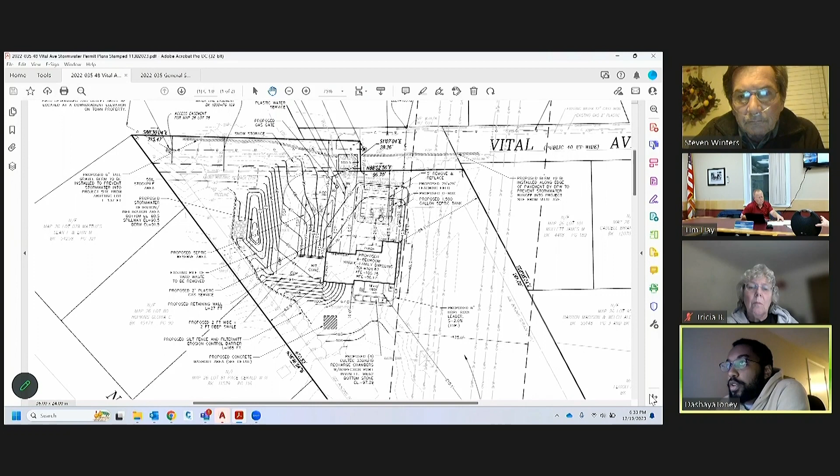My name is Dashaya Joney, I'm an engineer with MBL Land Development and Permitting. I'm here tonight on behalf of our applicant for a full stormwater permit application for the property at 48 Vital Ave. This is an existing vacant lot, and we're proposing the construction of a single family four-bedroom house with a septic system, site grading, access, and utilities.

As part of our project, going back to the town, there were some concerns from the abutters regarding the stormwater treatment at this site. So in order to alleviate those concerns, we prepared these plans and the application that we submitted a few weeks ago. Site grading wise, we're not proposing to send any runoff into the road by the lot.

We're going to capture all of the runoff generated by our site, both from the roofs. We're proposing subsurface drainage chambers in the back of the site, and we're also proposing a mini stormwater detention area that's going to hopefully capture the runoff that runs off of our site from the driveway and the rest of the yard into a little basin that will infiltrate some of the runoff before it goes into the spillway. Our hope is to alleviate concerns, because there have been some issues with heavy rainfall events at the site, due to the nature of the existing grading topography.

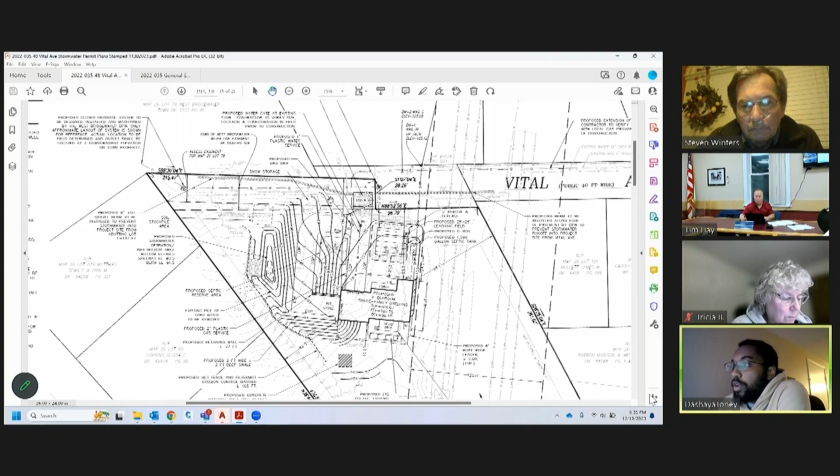With those measures, we hope to address the commission's concerns and the abutters' concerns in regards to the site, and at the end of construction, to implement these controls. We believe we have a working drainage design that will keep as much runoff as possible on site, and any runoff that is sent off site we capture in detention.

The abutters' concerns are with the runoff that's actually happening now off of the property. Once this basin is completed, will there be stormwater runoff continuing after that, or once it's loamed and seeded, will it all be contained in the basin at the bottom?

After it's loamed and seeded, in theory there will be very minimal runoff occurring. In a 100-year storm event, we had some very heavy rainfall early this week. There is bound to be some runoff that just isn't able to be contained in this little basin, but it is going to help the existing state of the site.

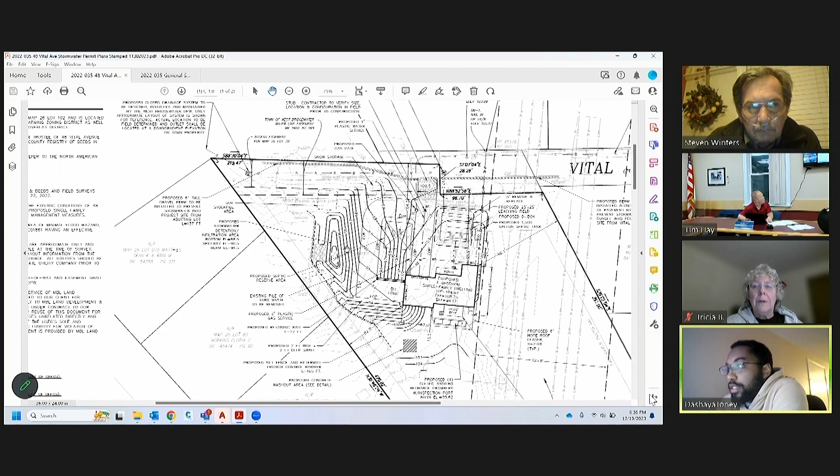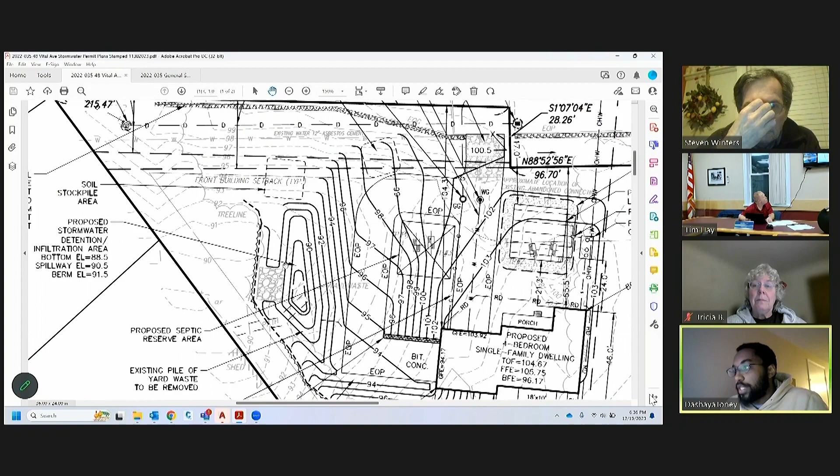I'll zoom into the existing conditions so you guys can get an idea of what the site looks like now. This low point right here is where the water goes, and they've been in touch with us and the town, and we've tried our best to alleviate their concern regarding this. Right now, this existing runoff all comes down to this low point off-site. We can't really make any changes to the property grading-wise, but with the implementation of this basin it should greatly help.

Especially when it's grassed and seeded, to infiltrate some of the runoff, so it's not sending all the runoff off untreated. We can't say for certain that nothing will be coming off site, but we've done our best to make sure that it's as little as possible.

Is this spot vacant right now, or is there a lot of trees they gotta cut down? It was a treed lot. Was? How long ago was it? Yes, years ago there were some trees present on the lot.

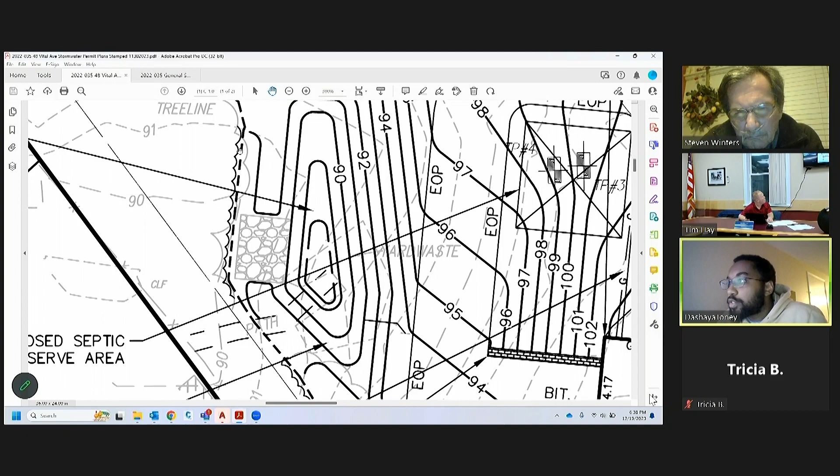We have that tree line shown right now, and we're proposing minimal disturbance to the tree line. You can see here we have our tree line, right next to our erosion control barrier, so we will be disturbing some of the trees in this area. But for the most part, in the rear of the site and to the right, we've tried to keep the tree disturbance as minimal as we can.

So there's no room to replace any of them on that? Doesn't look like there's much space left.

I'm new to this, are we allowed to butt in? Are we allowed to ask? Yeah, we will. Okay. That tree line, is it non-existent at this point? I'll open it up. If you want, I'm all done.

No, I was just wondering if there's any spot you can replicate those trees that were taken down. There's no wetlands on it, so this is stormwater only, so we really don't have a replication option. Okay.

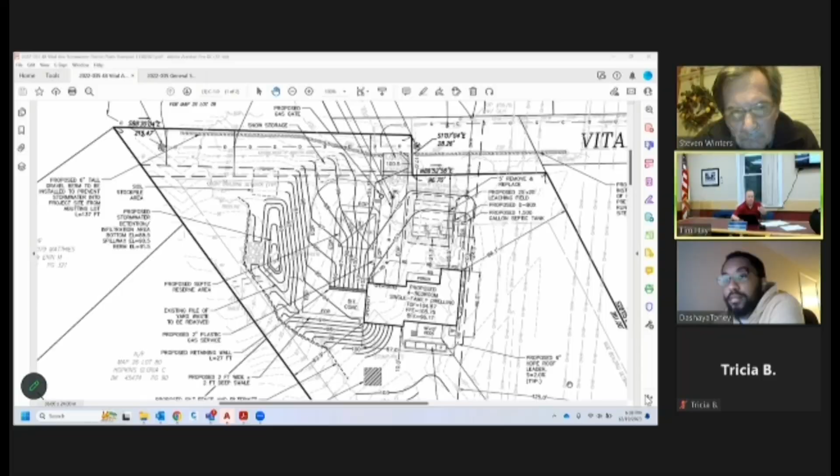Okay, now we're going to open it up. Anybody's got something to say needs to stand up, yeah, just give your name. Michael Cotty, 23 Norman Ave, neighbor to Gloria.

She's the one who's mainly getting hit with this water issue. Basically her backyard is a lake right now. I'm not getting hit that bad, but this tree line he's talking about, they gave us a 30-foot buffer after they took all the woods out, and it's doing absolutely nothing. It's scattered trees, maybe a dozen trees in that 30-foot buffer. So I don't know what he's talking about, trees helping out, because there's nothing there. And now they're talking about taking more of the trees out.

How was it before they cut the trees down? There was no water, I've been there 30 years, not a drop of water, never, especially on her property. She is the lowland person, and there was nothing there ever. Now she has a lake back there. She's got pictures to show you.

So this wetland proposal of his, disturbance, he's saying maybe it's gonna work, you know, in theory. All right.

Gloria Hopkins, 27 Norman Ave. Are you saying you're taking more trees down?

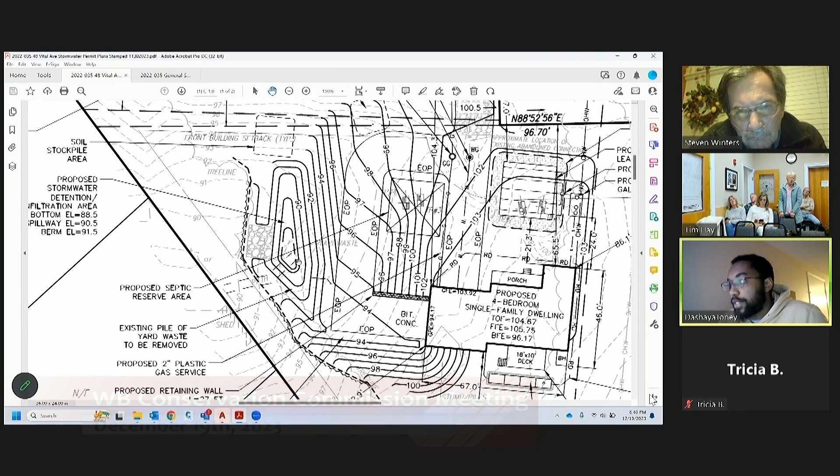May I answer that question, Mr. Commissioner? Okay, can you fix his mic? So I know, we are in this area, we're doing this, so just for the grading purposes, in order to install this basin, we are proposing to clear around, let's say, between 5 and 10 feet of trees in this specific area.

But you've already removed all my trees, that's why I have water. See, part of the problem with this is you've come into this with the lot already being clear cut. Prior to the starting of this single-family home, it was a treed lot, fully vegetated. And now that you have cleared it, we're getting the stormwater runoff issue, which never existed beforehand.

So you're guaranteed that you don't think there'll be any more? We're trying to make it so there is none, where there was none previously.

So we're looking for a little bit more guarantee that either this system needs to be made bigger, or it's going to work, or you can make the house smaller. It's too late, they already poured the foundation, already done.

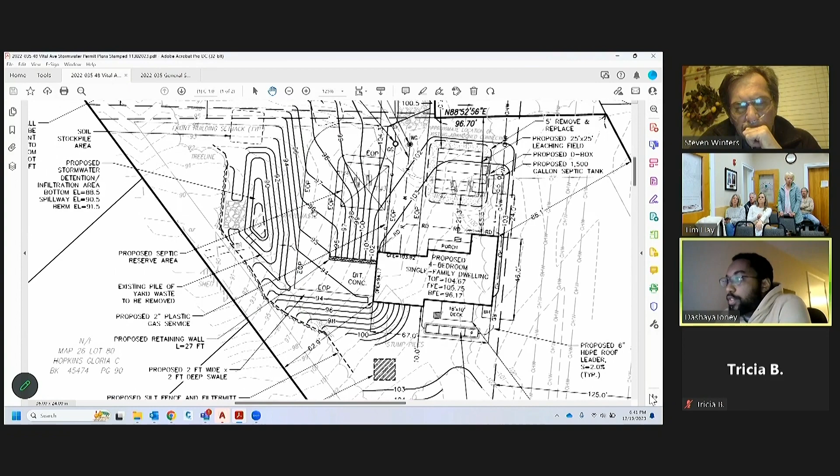If I may answer your question to hopefully alleviate some of your concerns. I definitely understand where you're coming from as far as the tree clearing goes. It was not the applicant's intent to bring more stormwater to you guys. To address that, the roof runoff will be fully contained within underground chambers, so there will be no runoff from the leaders. The only runoff coming from our side will be from the driveway and the grassy yard.

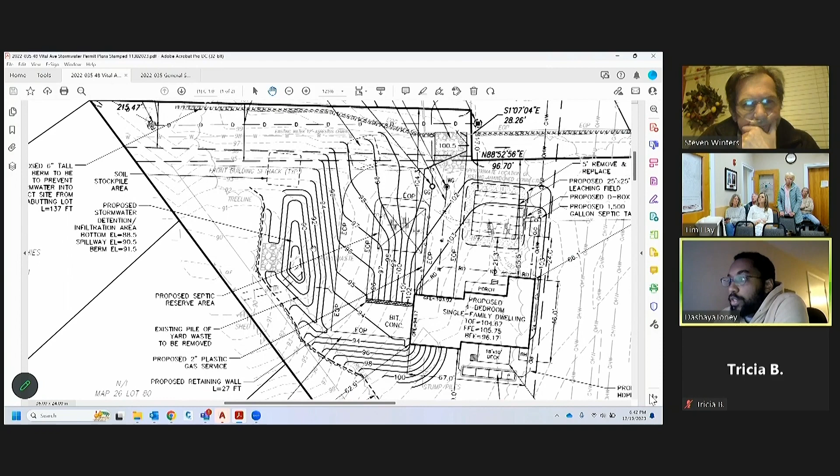To further elaborate on the basin, we performed test pits out here and found that the material is essentially pure sand, which Board of Health agents can attest to. With the installation of this basin we did some sizing in accordance with the Massachusetts stormwater regulations, trying to ensure that for the 100-year storm event—the maximum rainfall event in a certain time period, simulating the worst case scenario—we designed our basin using that information, providing a low point where it'll pool, still on our site.

Once it gets to that low point, there will be some runoff coming out. We're trying to make our best efforts because there's no way to 100% guarantee there's going to be no runoff—it's just the nature of how weather works, we never know what type of rain we're going to get. But we did do designs with the 100-year, the max worst event, and with those simulations we saw very little runoff coming out of this basin through the spillway.

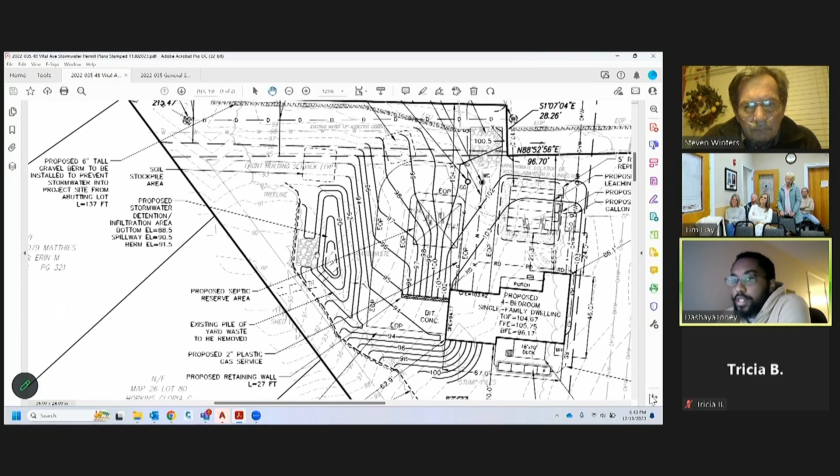So hopefully that answers your questions a little better. If you have further questions we can elaborate. And the only thing that gets us is that this whole lot is in a wetland lot.

As long as it's designed for the 100-year flood or 100-year rain event, it will release water in an event greater than or at that stage, but you won't have any of the silt or sediment that you're now having. Back when it was all trees and vegetated, you were probably getting runoff in that area, but it was clear water, and it would sit and disappear rather fast compared to what's happening now.

The trees would take care of it before, and now you have a gully behind me. Can you not force them to put some trees in? Because there's nothing there to absorb the water, nothing to drink the water. He's talking about taking more out.

When it's all seeded, can't you put any trees up along the borderline? No. What if rather than seeding it, you put in stuff like they put in the gullies at the high school, with natural vegetation, so it would absorb more—grass isn't going to absorb that much. Some more wetland-like natural shrubs and vegetation, yeah.

Well, is he going to fill that gully behind me? Because it's all tree stumps, it's all garbage that they put there. It's their land, but I don't think they can do that.

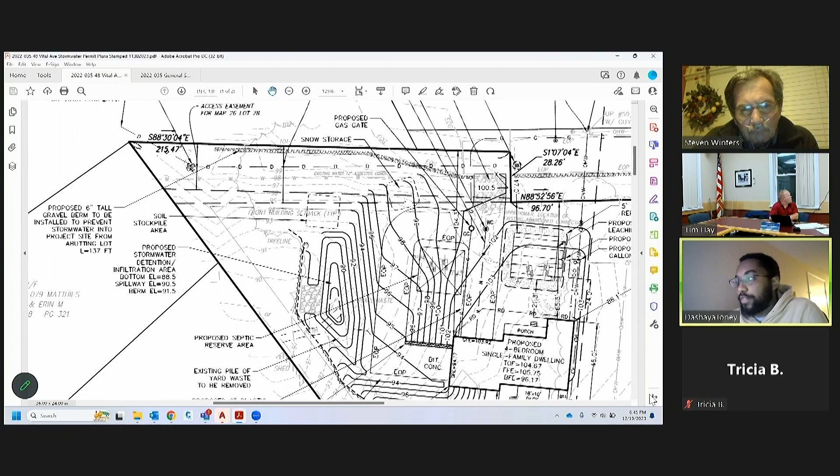In some areas it does. If you look at my question, in this area it's almost exactly along the property line and extends further up in this area over here. Right at the edge of the silt fence is where we're proposing to start the grading for our basin. Am I still going to be allowed a 30-foot buffer?

That's my understanding. She wants to know if she's still going to be able to have the 30-foot buffer after this is all done. When you say the 30-foot buffer, could you clarify on that point?

I think according to building code, that's the setback for the building. Setback is what I mean. Right, for the building itself. And the setback for the building is 62.

Well, when they cut all the trees down, sidewalks and all, they left us 30 feet, right? Now, yes, scattered buffer trees that we have shown. This is their property, right? I don't know, that's what I'm asking. I don't know if they put markers right up to my borderline, right up to my property line, so I don't know what that means.

The little orange stakes. So does that mean they're right up to my property line or part of the property?

Is there any way you can replace some of those trees after everything is seeded and up against the property line and all that?

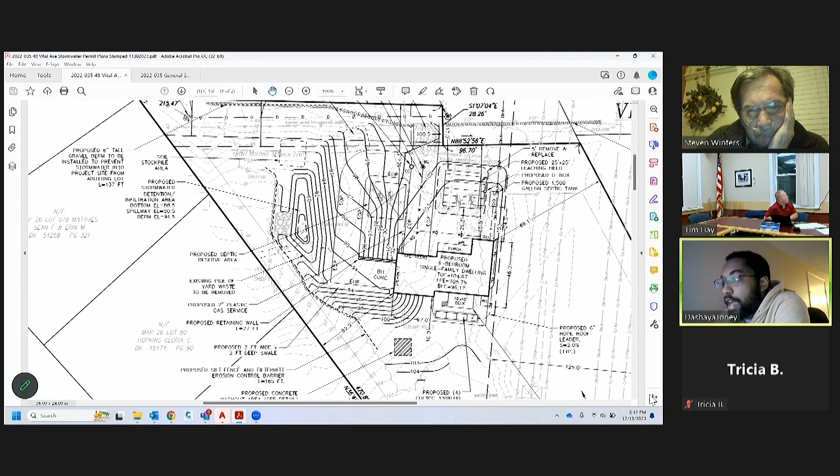Yes, we can propose either trees or vegetation like arborvitaes or shrubs, if that's your preference. We can talk to the applicant about that and see if they're willing to do that. I think they would be, in order to hopefully alleviate your concerns, bring some of the trees up and clear it back. That in conjunction with the basin I believe would alleviate a lot of the issues we're seeing at this moment, so that the commission would be comfortable with us. Is that something?

Tim, I'm possibly opposed to them removing any more trees behind me. They've taken them all. Yeah, the thing is, if it's on their property though, they can replace them after. They won't, unless we tell them to.

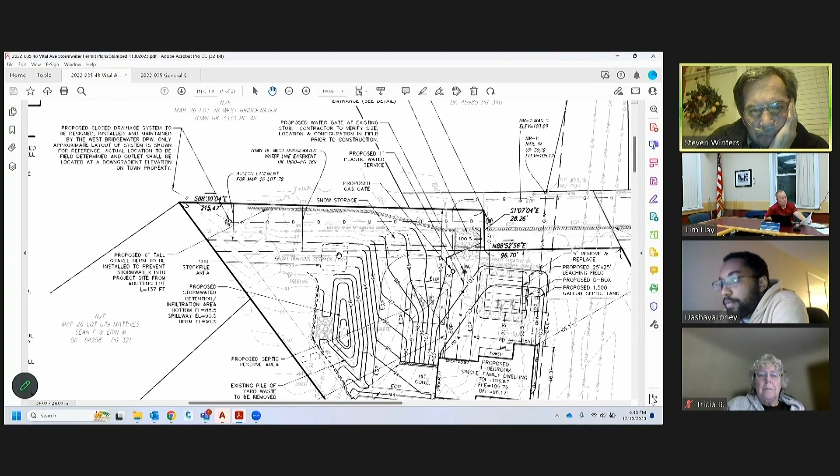So would planting, say, 4 trees in that area and 4 trees in the backside, 2-inch caliper size, be sufficient?

That's something I would talk to the applicant about, but I think they'd be 100% okay with doing that. And if the commission is satisfied that we can implement that, it can be part of the decision approval as a condition for the site sign-off. These plantings need to be done just to alleviate your concerns about the planting potentially not being done, so that can be a condition we put in.

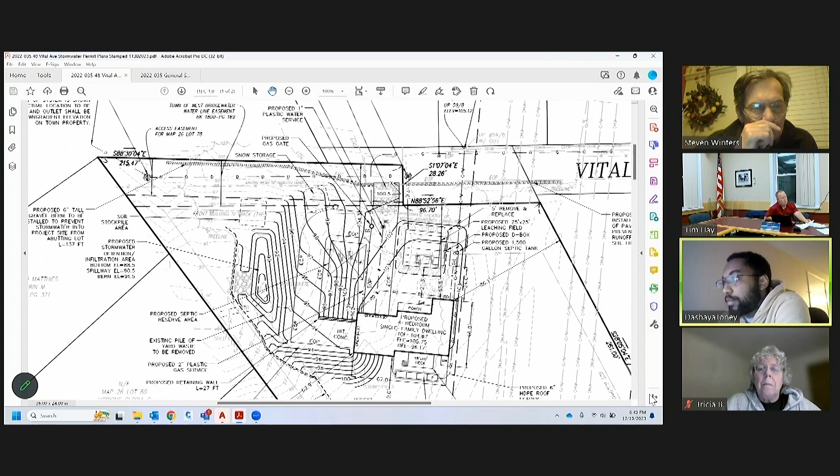I'm just trying to see where we could put trees that would actually have a chance of living instead of just planting little tiny saplings that probably won't take. By putting 8 larger substantial trees, 4 on each side of that sloped area, that would hopefully give you a greater buffer, and once they start to get established, the runoff would be shed further out and not right onto that open area.

And removing all the stumps and stuff that's there too. Trees do grow there, we had substantial trees there for many years. Yep, they will take. I just don't know why they have to take any more of my trees.

Well, again, looking at the elevations, where he's saying along that area that has to be graded, they may or may not have to take the trees. Because if you look at it, to get to the 96 elevation, it curves into that area.

Yes, that's something we could look at, reducing the disturbance. So this is where the trees are, and he has to get to this elevation of 96, so they may have to take a few, they may not. It all depends on what the actual grading ends up looking like.

So for whatever they take out, if they have to remove 4 trees, they're going to have to put 4 more in, plus 4 more additional on the other side, as mitigation for whatever they might have to take down, to help buffer what was removed when the house lot was cleared.

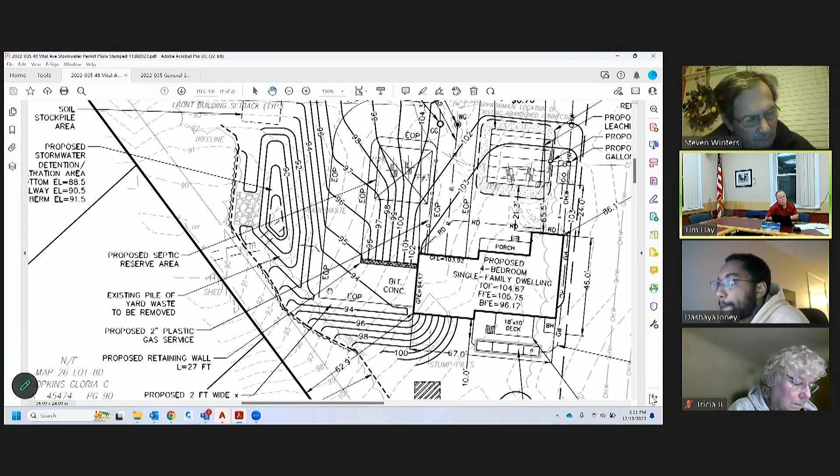It's hard to say, you can't -- I mean, I can't take any more down, but they have the right to do it. Well, why would they want to? Also, wouldn't they want their own privacy? Why would they want to be looking at my house?

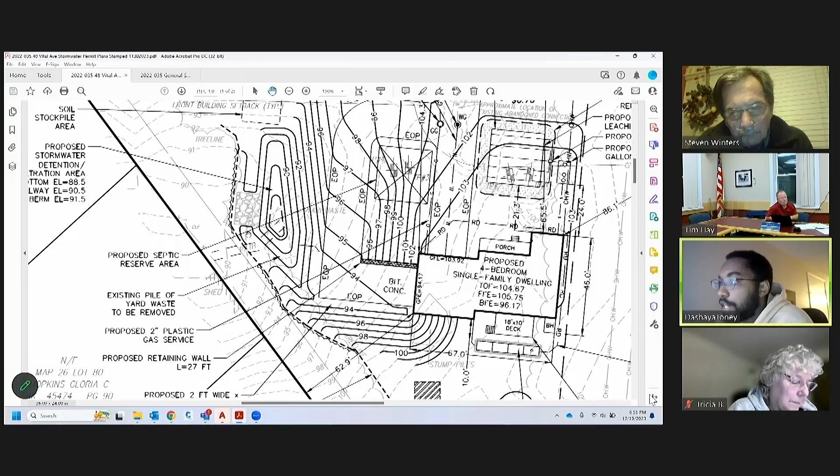That's not even normal. I understand. The reason why we're proposing the trees to be removed slightly in this area is due to the grading, as we were just discussing.

So right now, we're proposing to tie back into the existing grades, which creates a bit of a swale channel to direct the runoff. Instead of going off-site to your site, it would go to this basin here via this grade. We can do our best to pull back in this area, but we really don't have room, with the septic system and the building setback itself.

Which is why we have the grade shown as it is right now. We tried our best to reduce any more disturbance to the trees beyond what's already been done, but some of it will be due to the grading.

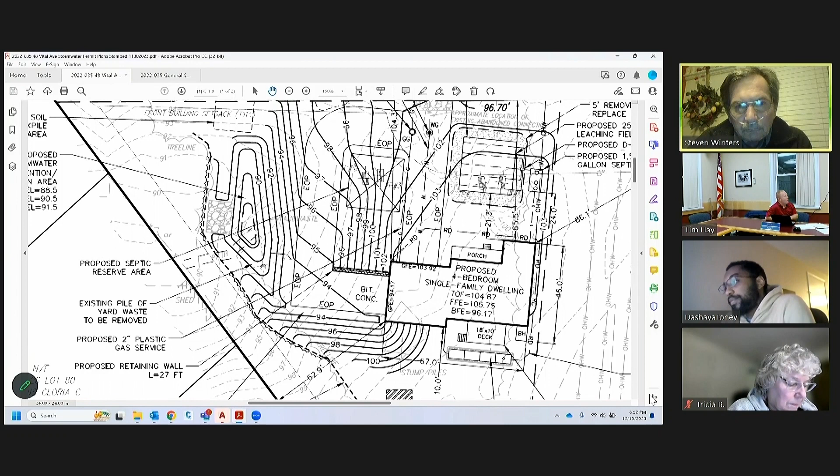If this was a wetland lot, we would have like a 50-foot buffer to tell them this is where you can go, you can't go any farther than that. But it's not a wetland lot. Well, it's not a wetland - we just have to deal with the stormwater, the runoff.

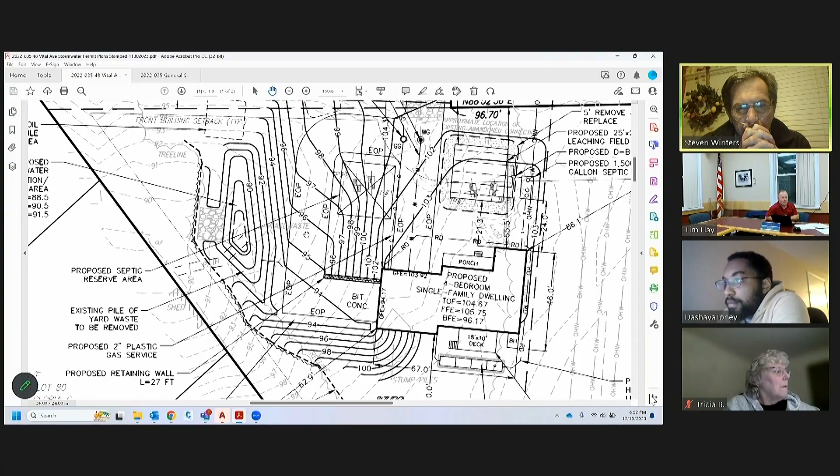Hopefully after everything's done, planted with grass, trees put in, it might take a little bit, but in the long run it should work. He's not even guaranteeing it will work. Clearly he's not guaranteeing it. Well, we are guaranteeing that they're going to put in the trees, no matter what. So we're going to do our best to help out the neighbors, even though it's not what you might want to hear.

Well, they created the wetland, not me. It's runoff right now, it's not considered wetlands itself, but... you can fish in my backyard. I know what you're saying, but it's not considered wetlands.

So if we make them put the trees in - would 8 trees satisfy the buffer you've lost? To start, better than nothing. The more the merrier. We can write that in as part of their stipulation in the order of conditions for the permit.

They took down a forest, how do you account for that? Right, as a property owner they have the right to take the trees down, but they also don't have the right to put more water onto your property. By taking all the trees down, they've created a greater potential for runoff, which has happened, so now they have to figure out a way to treat that.

Between increasing the tree canopy by replacing them and creating this stormwater basin and swale, they can direct and channel it so it's not hitting straight down onto your property. It's going somewhere to be contained, and when the basin overflows it will go out through all this rock, minimizing runoff at a slower rate than what you're getting now.

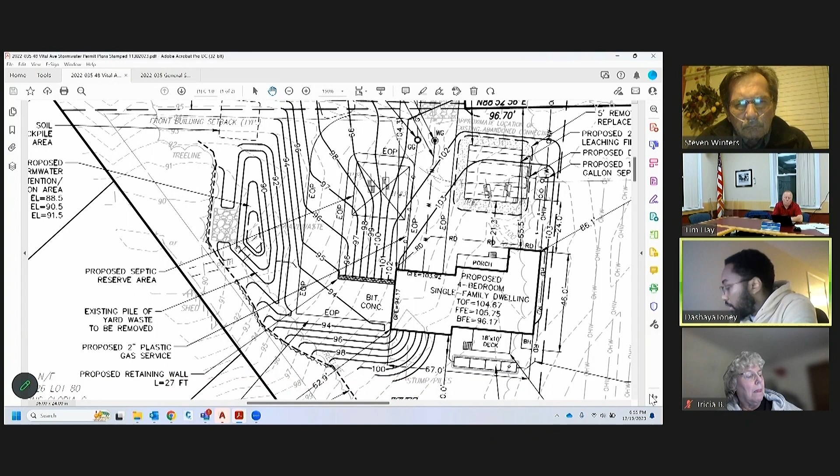So they just have to stabilize the silt fence again. Are they going to do that? That will be part of the order of conditions, that they have to maintain it, and I get a weekly report. We can work with our client and contractor to get that stabilized ASAP. I don't know if they can do it this week, but we'll definitely get on them to make sure that's taken care of, so that'll be done before anything else is done further.

What's the ramification if they don't maintain the silt fence? They can get a fine - there's capability for that, once they're in violation, to start. Who gets fined, the contractor or the homeowner? The owner, the property owner, every day until it gets fixed.

Are they going to maintain the stone gravel up by the lab like they did? They had laid stone along by the lab, and now the trucks have run it over, so it's no longer there. They'll have a construction entrance during construction, which would be stone and grout, or a stone entrance to keep runoff and debris contained. And it looks like you do propose a swale along the edge.

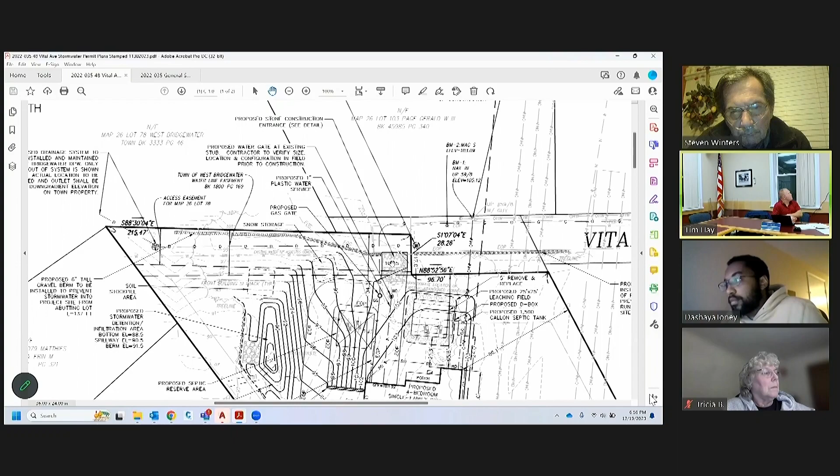Which are you referring to? We are close to the entrance right there, still. Yes, the berm is along the side of the road, the stone.

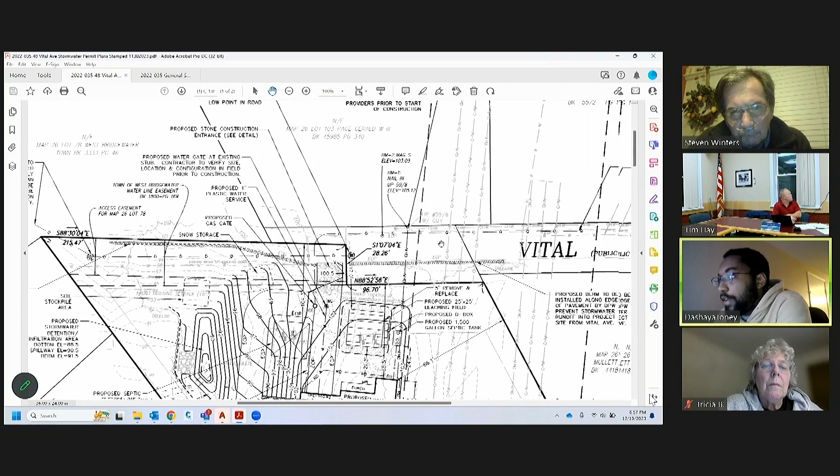This berm, we had discussions with the DPW, and they agreed that in order to improve the drainage in this town right-of-way, they would install a catch basin at the low point in Vital Ave, and direct this runoff to the body plot that's owned by the town of West Bridgewater, which is much further down.

So is the DPW gonna put a berm up along the side of the road, which will funnel the water to the catch basin? Yes, that is the intent of what the DPW plans to do.

So all the runoff currently on Vital Ave, which is contributing to the runoff on this property, a catch basin would alleviate that amount of runoff. So theoretically, you should have all that runoff going onto their property eventually going through the catch basin, because that's where it's coming from, Vital Ave.

Why does the DPW put up the berm and not the contractor? That's one question too. Because it's the town layout, town road, and the water's coming from the town onto their property, from the roadway itself.

Yeah, but it's because of the property built. Well, the water's always run onto that property from the road. Just trying to divert it. And it's only because they're developing it and putting a house on it that this runoff issue has become an issue. Before, we were just dumping town water theoretically onto private property.

When there becomes a problem, they put catch basins in and berms up to redirect it. Which is what the plan is here, to eventually put a catch basin and a berm, after it's all done.

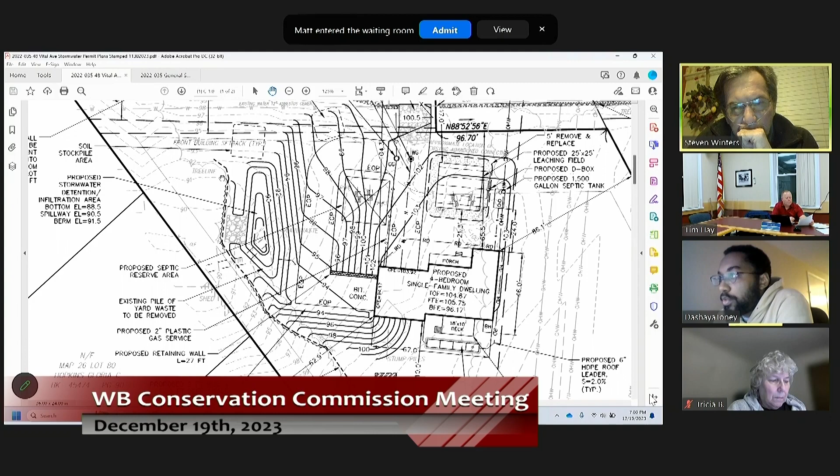Yeah, we can work out the location to make it so that the swale can get in, and then we can figure out whether the trees go above or below, or a combination of both. Understood.

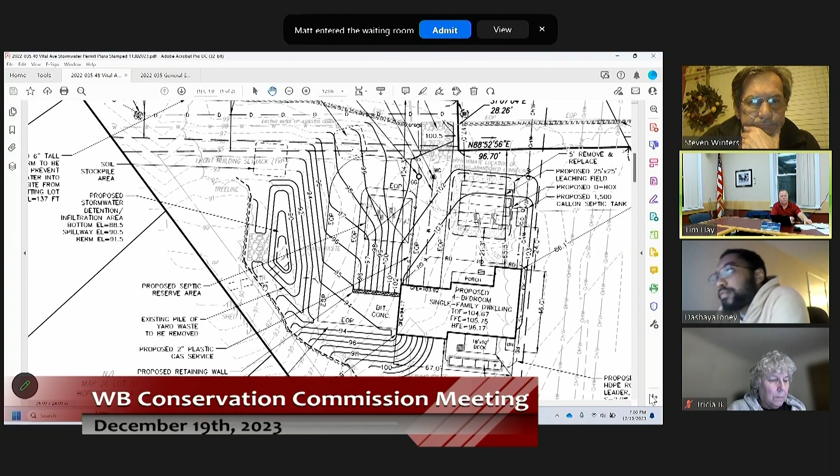It might not be what you would have heard, but I think it's doing the best we can between the catch basin going in and the trees being planted in this swale and stormwater basin at the bottom. I think the catch basin at the top will take care of a lot of street runoff, which is adding to the problem coming across their site right now.

It will definitely help, no matter what. I mean, it's gonna reduce the amount of runoff that's going onto the site, no matter what. If you're gonna take my trees down, I'd rather have the water.

Well, they're gonna put trees back up, so they'll give you some trees. Yeah, 2 feet tall. Well, I mean, you can't replace 80-foot trees. That's right, that's why I want them left there. I know.

All right, so, anybody else got any more questions? No.

I'll entertain a motion to close the hearing. I'll make the motion. Second? Second. Did I hear a second? All in favor? Aye. Then I'll entertain a motion to issue the general stormwater permit with special conditions.

Yeah, of planting 8 additional trees to the property. I'll make that motion. Do I hear a second? Second. All in favor? Aye.

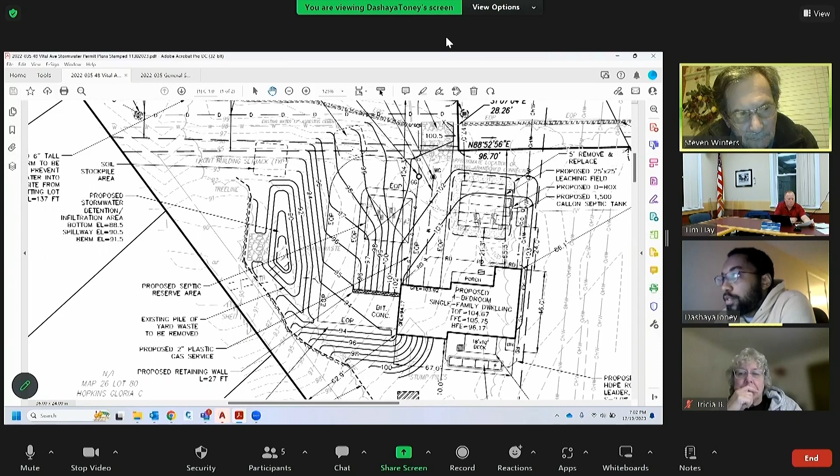Okay, we'll move on to the next one. It's a continued one, 686 Manley Street.

Thank you, thank you, sorry. Thank you guys, nice to meet you. Same here.

Continue, I thought you just continue on. We were at the last meeting just waiting on the final blessing from the consultant. Honestly, I think we got it the day after the meeting. Well, we meet Tuesdays, we got it that Thursday, so we're 2 days late.

The only outstanding issue we had, he suggested we dig a couple more test pits in each of the drainage basins. He said it would be up to you whether you wanted to make it conditional and do it during construction, but we knew a guy with a machine, so we dug them last week and submitted the test pits to you. They were exactly the same as the other ones, so it didn't require any changes in the drainage system, so that was it.

So we did that just so you wouldn't have to condition it and leave that hanging out there. And I will say we did work on the entrance crossing and narrowed that from the proposed, so right in there's this area here.

Less disturbance to the wetlands on that side, and we worked to mitigate as much disturbance amongst the parking area itself. There is some encroachment on one side of the 50-foot buffer, but less on the other, and there are areas of 50-foot buffer that they're not gonna touch.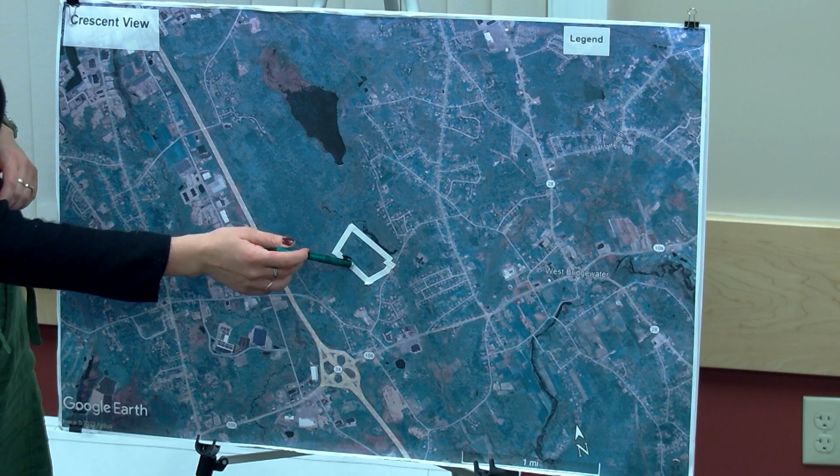West Bridgewater, thank you. Our site is generally forested, undeveloped land. There's a degraded single-family building - has that been a two-family house? Still there at 217 Crescent Street, just off the road. Otherwise it's generally undeveloped, either forested uplands, forested wetlands, or some upland meadow habitat.

So just to put a bit more context to the site, here's Crescent Street again, and we have Old Crescent Street, which is a partially gravel and paved road providing access to a few single-family dwellings off of that road.

Our site is comprised of 4 parcels. One very large parcel sort of centrally here. We have a smaller parcel, 0 Stony Road, within the northern portion. The two-family house is within a standalone parcel in the southern portion of the site, and it also includes this small triangular portion between Crescent Street and Old Crescent Street.

In blue, we have our bordering vegetated wetland boundaries, which I'll call BVW throughout the evening. We have an A series here that has frontage onto Crescent Street and Old Crescent Street, and all of this area is upland here. The B series represents the opposite side of that wetland system, in the central and eastern portion of the site.

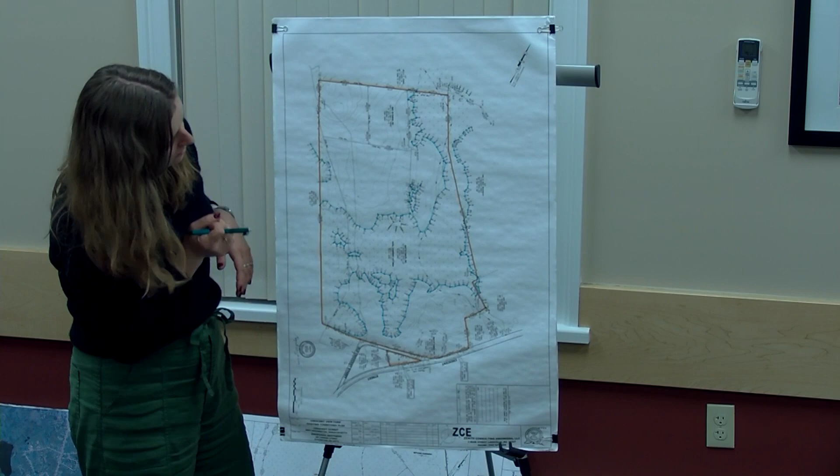This northern portion is all forested upland. There's an isolated wetland identified as a G series within this portion of the site. This F series, a little bump out that goes onto the site, actually connects with the B series, but it goes off site, so that's not part of our project area.

We have 4 isolated uplands within our wetland system here, identified with WB, C, D, and E series flagging. We have mean annual high water flags within this little portion of the wetland. We identified a depression that exhibited the physical characteristics of a vernal pool.

Ultimately, all of those boundaries that I just discussed were approved through Conservation Commission review. An ORAD, or an Order of Resource Area Delineation, was issued in June of 2022, approving those boundaries, and that's valid for 3 years from the issuance.

Two last boundaries I do want to talk through, or perhaps three, that were not included in the ORAD. This blue line work along the eastern portion of the site - that's bank associated with our Mill Pond.

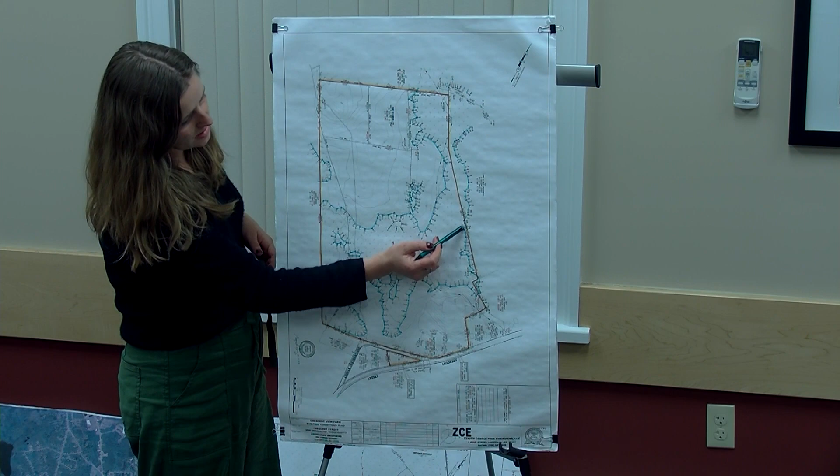That sort of juts onto the site a bit. That was not reviewed or approved through the ORAD, but it's a very straightforward, conspicuous boundary.

In addition, we have a few flags shown just off-site to the northeast, and that's a portion of the perennial tributary to Mill Pond. While it's not shown on our plans, there would be a 200-foot riverfront area extending from that boundary, and that would be entirely contained within our BVW boundary, so it doesn't extend anywhere beyond our wetland flags.

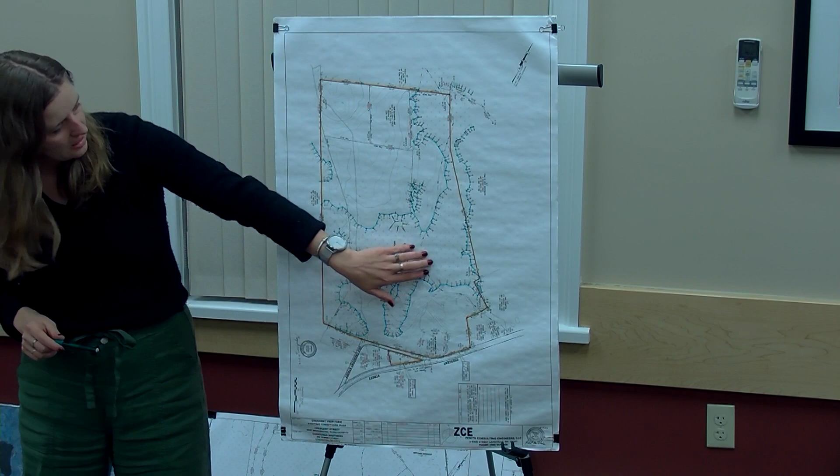The third is bordering land subject to flooding, mapped through a FEMA firm. We have a FEMA line shown along the eastern portion of the site, either within or just slightly above the BVW boundary, indicating there's a Zone A, the 100-year floodplain, in the eastern portion of the site. The remainder of the site is outside the 100-year floodplain.

So that's generally the description of the site itself. We do have a cart path that extends northwest through the site, and I want to point that out because it will be part of our discussion with the wetland crossing when we get to it.

I'll switch to this side of the presentation, which is our proposed project. The project itself includes the construction of 3 subdivision roadways. We have Jeffrey Drive, extending directly from Crescent Street into the upland meadow habitat that we have here.

I've highlighted in yellow the 100-foot buffer zone, just to give some context of what work is in the 100-foot buffer zone versus what's outside of it. The pink is identifying the sidewalks. This was used for the planning board meeting, so they wanted identification of the sidewalks, and I think it might be helpful for this discussion as well.

So Jeffrey Drive is going to be extending from Crescent Street, providing access to 6 single-family homes. At the terminus, or the cul-de-sac of that road, we have an infiltration basin, I believe, and a portion of that basin is within the 100-foot buffer zone.

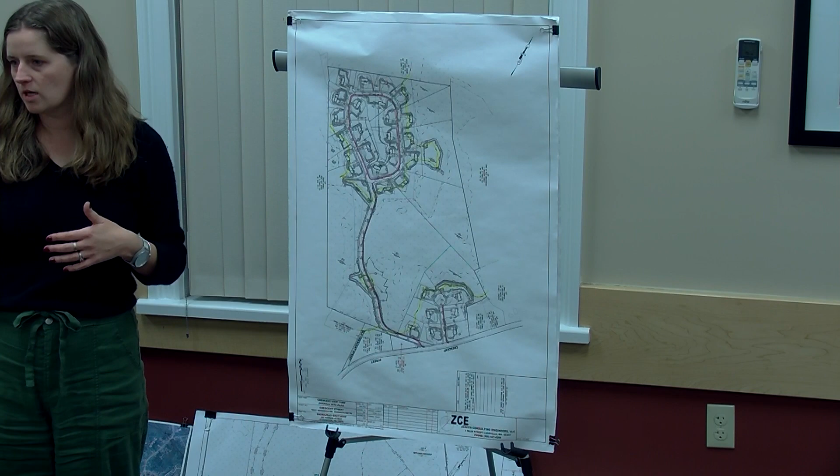So it's going to be taken out of the development as an individual house? Yes. Basically, we're looking at the stormwater structures and the wetland crossing for the infrastructure for the road at this point. We're asking for permission for the roads, the stormwater, utilities, grading, clearing, associated with that. In order to design the stormwater, we need to account for what we'd expect for the homes, so that's why they're conceptually shown on the plan.

If I can ask, I don't understand the relevance of that, if somebody can explain it to me. Well, what ends up happening is any house lot, or any lot that has wetlands within the construction zone area, would have to file before us.

But the only thing we're regulating is the stormwater systems itself and the wetlands that are in that layout for those structures. So then we get another look at each individual house lot, where the planning board will not be looking at each individual house lot because they will have already approved the subdivision plan.

But I don't understand why any of them would be allowed to be within the 100-foot buffer zone. Oh, we're not saying that they will be or will not be. We have a 50-foot no-touch zone for new construction, without mitigation and a good reason for granting the variance.

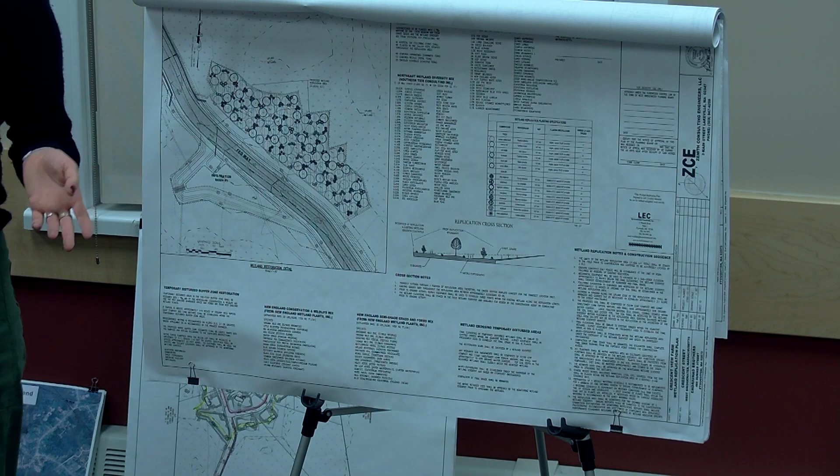So we presented this project informally to the commission, I believe this spring, and that's where we asked for some input from members of the commission on the ratio of replication that you would all prefer. That's where we received input that you would prefer we go a 2-to-1 replication for area lost. So we've provided that through this replication area. It's a little over 31,000 square feet.

We have about 270 plus shrubs and saplings proposed to be planted there, a very diverse plant list. We also have a wetland seed mix that'll go in, as well as about 90 pots of ferns, just to establish the ground cover there.

We do show it approximately 25 feet off of the toe slope of this road. I touched base with Tim this morning, and Tim mentioned that the commission might request that we consider a bit more of a pushback off the road. So we can consider that if you guys would prefer, and we could even consider, in an effort to keep it at 2-to-1, just elongating it here, and we'll just see how we can mix and match.

Is that because of runoff? The concern was that we have the 50-foot no touch, and putting the road runoff and the 50-foot and the new wetland line literally right beside each other. You're not gonna get any stormwater or salts necessarily, they're gonna be in the catch basins and the drainage system, but when you're plowing snow, that's gonna flow over, and that potential to get into the replicated new wetland. So we don't wanna ruin a wetland that we just spent a lot of time making.

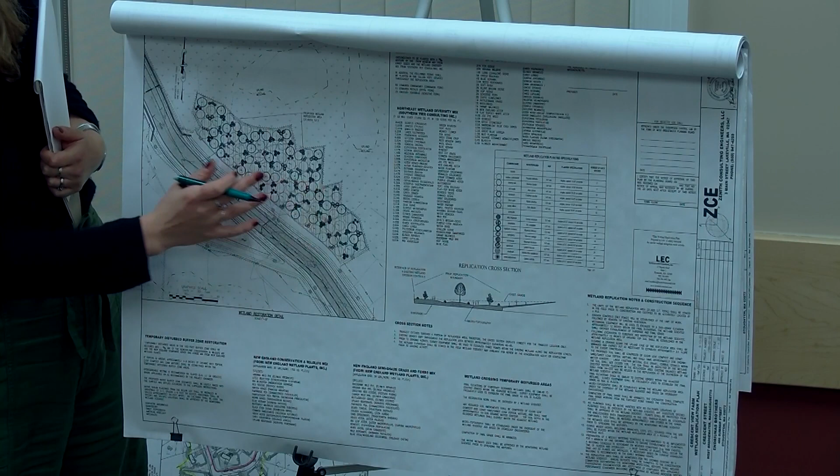And that replication area is an upland, correct, just so people know that too. Currently this part of the site has a lot of Tatarian honeysuckle and multiflora rose, so non-native invasive plants. So in essence, this replication area would be an improvement to that portion of the site, in addition to providing the functions and values of the area lost, times 2.

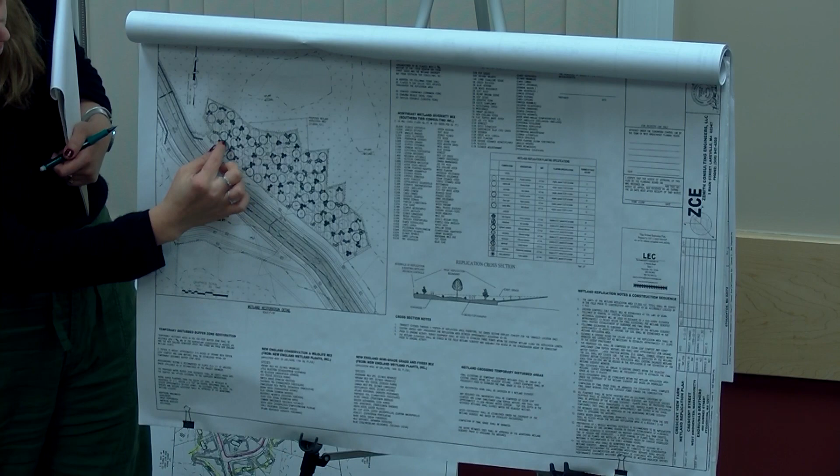So that's something we're happy to consider, just elongating it and pushing it back. Do you have any input on what's the most you want to go back? I think if we went 50 feet, that might take a large chunk out of this. How far back is it now? It's 25 feet currently. Went another 10 feet to 35 feet and then just elongated the distance to get the same square footage, if it takes it to the old Crescent Street corner, that's where it needs to go.

I'm sorry, I have another question. If that's already uplands, how is that a replication of wetland?

So part of our plan for how you typically start these replication areas is you excavate approximately 12 inches below your proposed grades. So equipment would take out the topsoil in this area, go 12 inches below our proposed wetland grade, which would still be lower. The idea is to really match the existing wetland line and the elevation there. So we excavate 12 inches, backfill with 12 inches of clean organic topsoil, and that would essentially match the existing wetland line, or the elevation of the undisturbed portion of wetland here.

And of course, during excavation, we have wetland scientists, either LEC, we've worked with Al before on these projects, and they'll come out to the site before they backfill, and we come out with our shovels and confirm that we're actually observing evidence of hydrology in the water table, confirming that it would stay within 12 inches of the soil profile before they start backfilling.

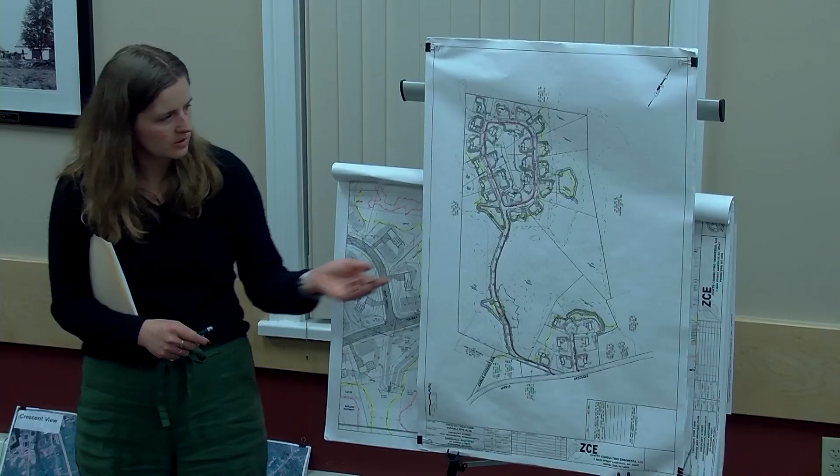I believe that's something also addressed through the ORAD, I'd have to take a second look at exactly how it was worded, but when John Delano was taking a look at the site, I did let him know we flagged this, and asked if there's any determination we can make on this pond versus river. I could take another look at how he worded it, but I know when he was reviewing the ORAD, he did look at the flow characteristics to the east of the site. So we can certainly evaluate how that turned out as well, but I know we didn't ask him to confirm any flags.

I'd like to ask another question. It's Tricia Bowers. I have limited understanding of all of this, but I'm trying to understand and follow. When you do the wetland replication, does the resulting uplands that you've turned into a wetland have the same benefits as the wetlands have, such as recharging the underlying aquifer systems and things like that?

Yeah, so if properly constructed and installed and maintained through monitoring, the idea is that when you create wetlands, they would provide those functions and values that are provided in the natural wetlands on the site. The key to meeting the standards under the state regulations and mitigation standards is that we have to tie into an established wetland system. So we're not creating a wetland in a bowl somewhere that isn't going to provide those recharge functions and values or stormwater storage, any of those characteristics. We're really tying into this wetland, and essentially expanding upon an existing wetland on site.